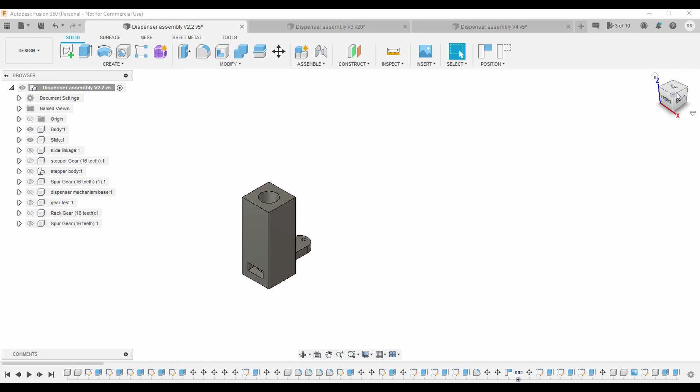So then we've got a slide, and that will move in and out. If we look at the top of this, you can see down in here the hole where the pill would drop into. Push it through and it drops out the other side. Pretty self-explanatory there. So I printed this out, did some testing on it, seemed to work okay.

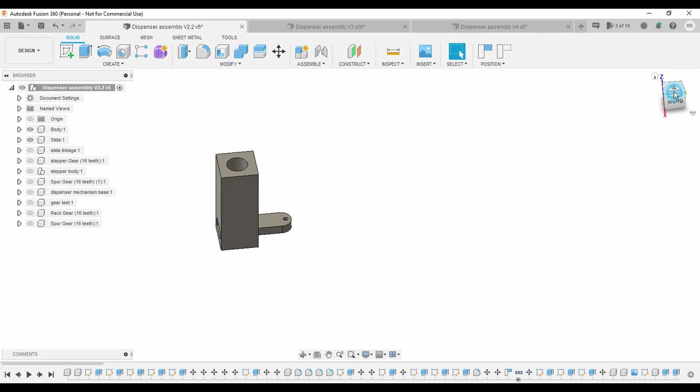So I'm like, okay, next logical step is to try to automate this. So I created a few other parts - I created a linkage, a gear, a spur gear to go with that, and then a stepper motor.

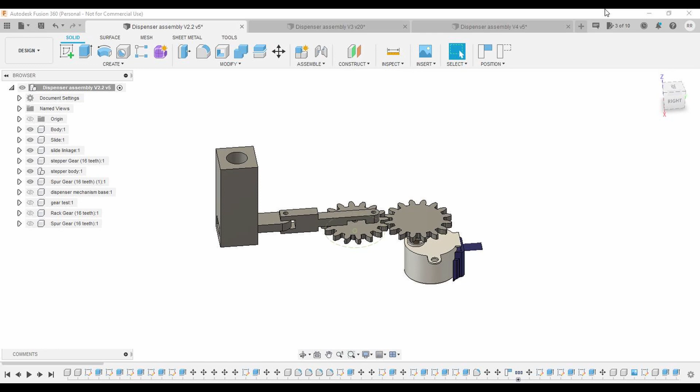So this seemed to work okay. About every 10 to 15 pills or so, it would jam up. And upon further investigation, the reason why - once this pivot point makes it over to this area, or directly opposite of it, the lateral force will either push it into this sidewall here or this sidewall here, depending on where that's at.

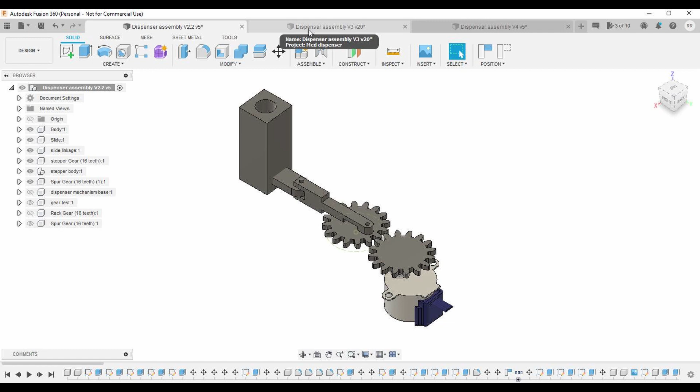I might be able to widen this section up a little bit to get that play, but it wasn't reliable enough for my liking. So I decided to move away from this kind of piston slide movement and go over to basically a linear rail that'll just push it.

The other thing, you'll notice right here, this is now blank, and that basically is going to hold that insert. So rather than have to print out this entire body for each individual pill, you just do an insert and the appropriate slide.

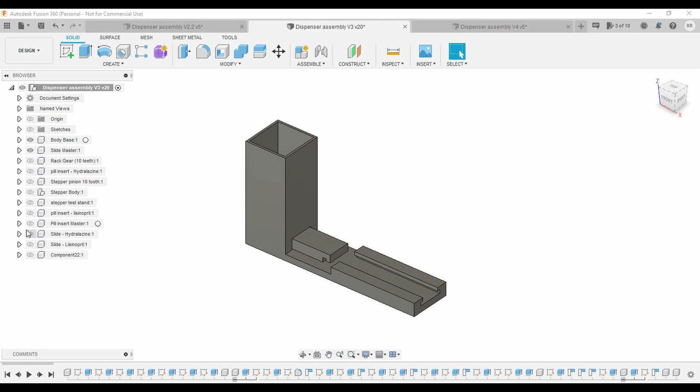So yeah, there's the slide, I just added it there. You can see that in there. And then where is... a pill insert? Nope, not that one. There we go. Yeah, and then you can see these holes line up, so on and so forth.

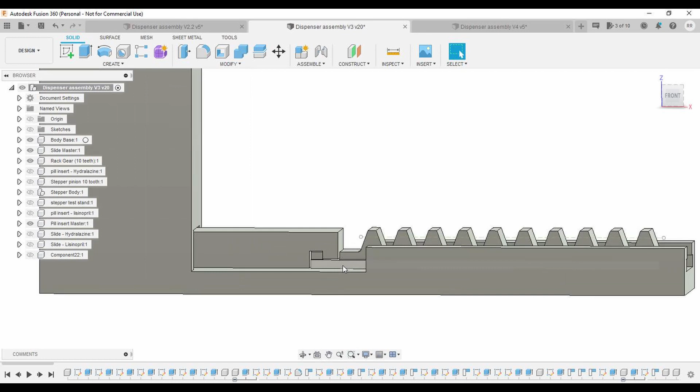So now we'll do the rack gear, and then I created a little, basically a dovetail joint for this, and that seems to hold pretty reliably, so I'm okay with that.

Now, same deal, we'll add the pinion, the stepper body, the test stand. So I wound up printing all of these guys out, cycled it back and forth, and I was able to get anywhere between 80 and 100 pills to cycle through, no problem, without any issues.

Now, this was designed for the first pill I picked out, which happened to be hydralazine, so I'll let the cat out of the bag - high blood pressure. So another one that I'm taking is lisinopril.

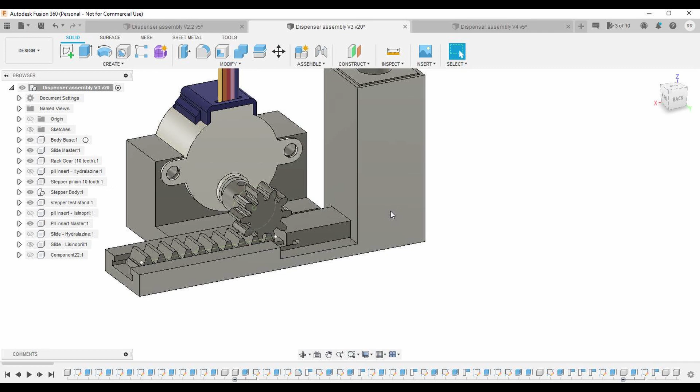Now it happens to be, I think, half a millimeter smaller in diameter, but it's also like half a millimeter shorter from top to bottom. And this wound up causing a problem where it would dispense a single pill perfectly, but you added 2 or 3 pills into the insert here, and it would jam up.

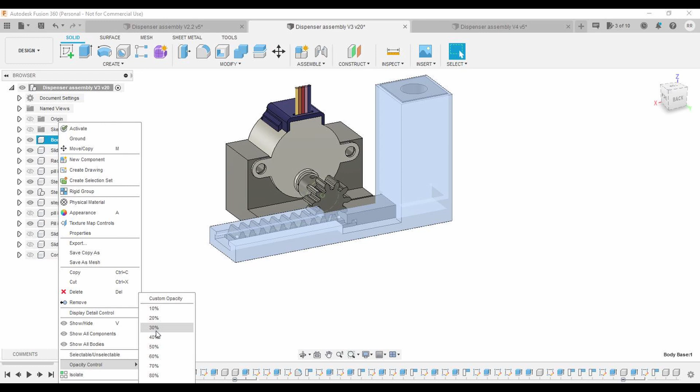So I got to thinking about it. Let me see if I can do this real quick here - body base, opacity, let's set that to 30%.

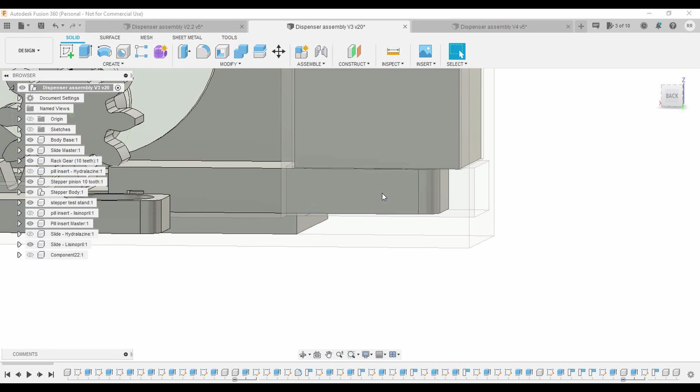So if we look in here, and I don't know if you can see this, but this little square area right here, you can see the line on that - just follow it across. That's what this pill insert rests on. When you look at the lisinopril slide, you can see it kind of dips down that half millimeter. Well, what winds up happening is the second pill kind of gets lodged in that and won't release.

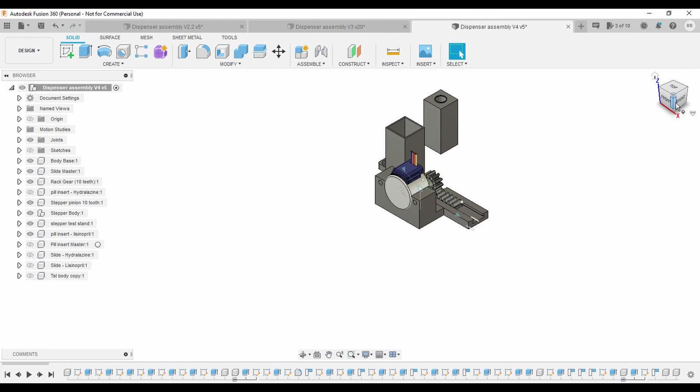So, okay, here we go - version 4. Everything else is still the same, and I haven't actually tested this one yet, but I probably will this weekend. So basically what I did is created a little lip on the bottom of it to take up that extra space, and hopefully that will prevent it from happening in the future, but I'll report back on that and let you know how it went.

So yeah, things to look forward to - hopefully when these parts come in tomorrow or Saturday, I'll be able to get the microcontrollers up and working, and then I'll give a functional demo of the pill dispenser doing its thing.